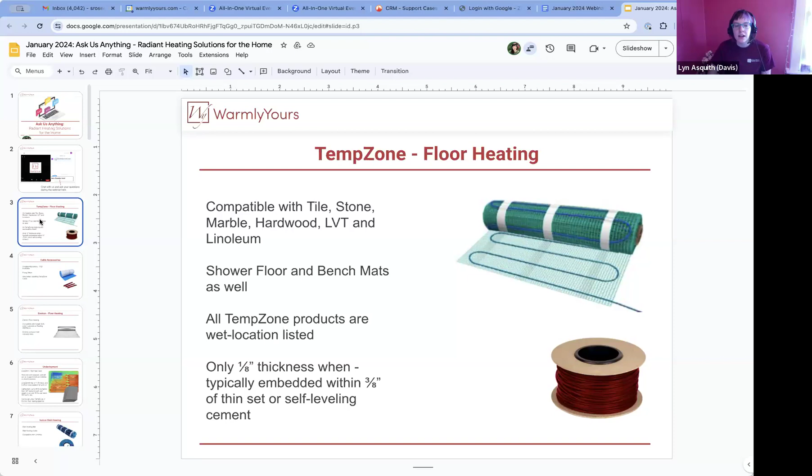Definitely. And can you actually go back to that last slide, Scott? Oh, sure. Looking at this picture, I think this is a good example of the two kind of main options you have with TempZone. You have our cut and turn mats or our loose cable. And then on the next slide, you'll kind of see the different options for the cable installation. So can you kind of walk us through what your choices are when doing a cable installation?

Yeah, cable installations do not require an underlayment or a membrane. Some systems out there, the only way that you can install it is using a membrane, but not every floor requires a membrane to be used. So sometimes there's no use to having that added expense, and that's why you can use the cable fixing strips and save yourself a lot of money. We're going to see a little bit later when we look at pricing that if you don't need to use a membrane, you can save a lot of money by not doing so.

So you have two different ways of putting the cable down: with the membrane, the Prodeso membrane, or you can use the fixing strips. And the fixing strips, you just put along the perimeter of the room, and you string the cable back and forth in those strips. And then you use that to hold the cables in place, because you always want to make sure that the cables are held in place at the correct spacing. You never want to overlap them. You don't want them touching each other, because that will be a problem in the future. So both of these products are designed to keep those cables spaced the way we want them to be.

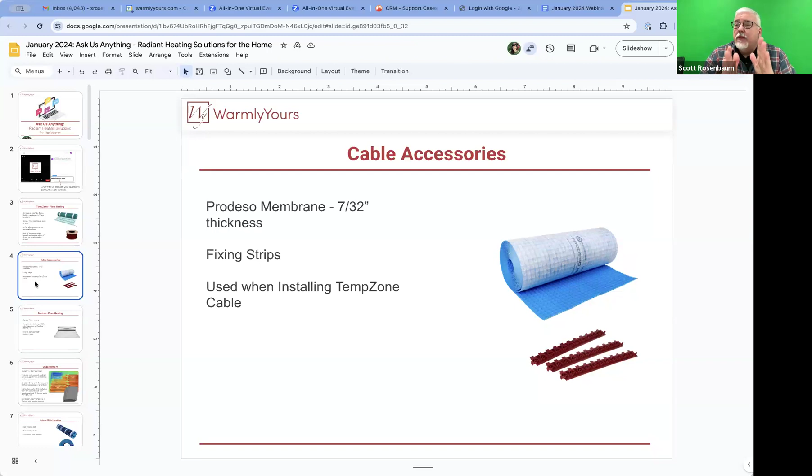Awesome. And then looking at one of our other floor heating options, we have Environ. So Environ is going to go under different types of floor than Tempzone. Can you kind of tell us where you would be utilizing the Environ product? Yeah, the Environ product is not wet location listed, so it's not designed to go in showers. You could put it in a bathroom if you wanted to, but definitely not in a shower.

I know some people that have used this with laminate in bathrooms. The thing is, it is not waterproof. It's water resistant, but it's not waterproof like the Tempzone product is. So it's to be used under carpet in the United States. Use it under laminate or floating engineered wood. You would not use this for LVT or any vinyl product.

This product is not attached to anything. It's not glued down, and nothing is ever glued or attached to it. It's simply put in a layer like a sandwich, and it floats around. And that's the key thing. This does not use thin set. This is not glued down onto anything.

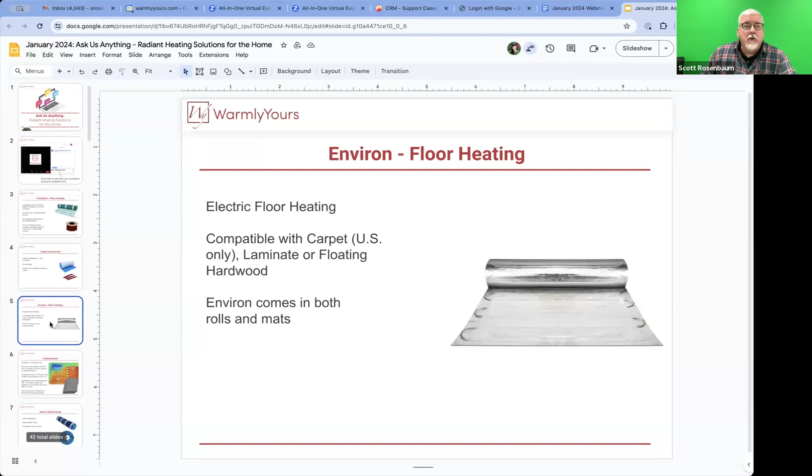Definitely. It comes in rolls and mats too. So if you want to do a great big area, you can do it like a big blanket and lay it out. It's about the fastest installation you can do when you're looking to heat a floor. Yeah, it's very, very quick. So moving on to underlayments, we do get this question a lot of, do I need to insulate underneath or above the floor heating? And the answer is generally on a concrete slab, you want to be insulating with our Cerazorb, which is a synthetic cork underneath the heat.

Can you kind of tell us what we're looking at here in this picture and why it shows how important Cerazorb is? Yeah, what we're doing is we're isolating the heating wire from the concrete. The concrete wants to pull the heat down into the concrete. Well, when it's pulling that heat down into the concrete, the spot you really want to heat, which is where your feet are, that's the spot that's not getting the heat.

So what you want to do is you want to put some R value between the concrete slab and the heating wire. And that's going to make the heat go upward as opposed to downward. And that's why you're putting this in anyway, right? You want to make sure that you have nice warm floors. If you take a look at this picture, this was a tile job that was done. And in this particular area, we left out a spot where the Cerazorb was left out.

So you can see that non-insulated area in the upper left-hand corner. That's where there is no Cerazorb. And see how it's blue there? That means that the heat that the wire is making is going down into the slab. All the other areas where it says insulated area, that's where the heat is coming up. So this was taken with a thermal camera, and you can see the actual difference here. And this isn't after it's been on for any long amount of time. This was just after a few minutes, and it's already 4 degrees warmer than if you don't use it.

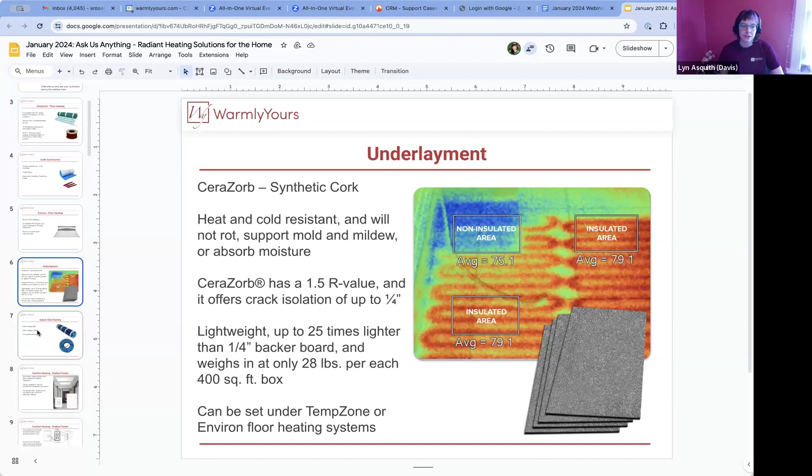And then our last but not least floor heating system is our indoor slab heating. Again, this is available in cut and turn mats or in loose cable. This is a great product if you're going to be doing concrete floor as the finished floor. So if you're looking at doing a stamped or polished concrete, or you're doing a new pour or new slab, this would be a really great option.

Yeah, if you're pouring a new slab, it's exactly what you can use. When you're heating a slab, it takes longer to heat up because you're heating 4 or 6 inches of concrete. Most of our other systems are heating 1 to 1.5 inches on the top surface, so the thinner the application, the faster it will heat, and usually the warmer it will get.

But we've done many jobs where this has been put into a new concrete slab. The most important thing is if you have a 4-inch concrete slab, the cable needs to be in the middle of it—you don't want it laying on the ground. It has to be in the middle because that heat needs to get to the top surface. So the most important thing when installing this product is to get it up in the upper half, at least an inch and a half deep. That's the sweet spot. Don't lay the cable down and then pour 4 or 6 inches of concrete over the top.

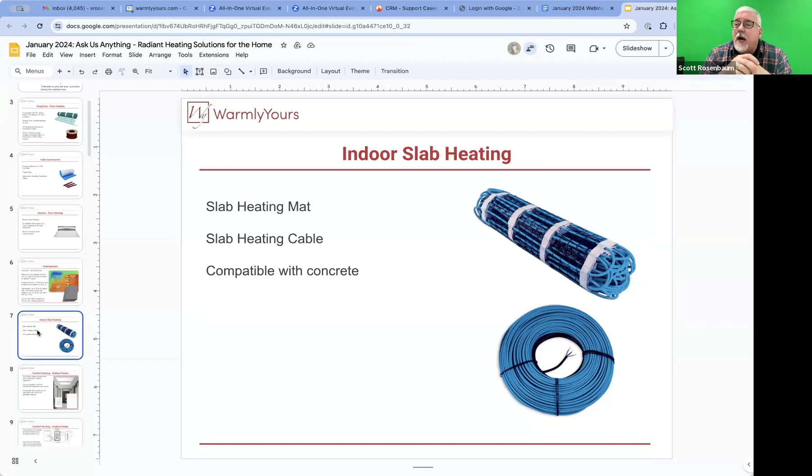Moving on to some of what we call comfort heating products, radiant panels are just an awesome product. They're really great if you're not looking at changing the flooring. I know for me, our house has the original hardwood—I'm not pulling that up to put floor heating underneath—but it definitely can still get cold, and radiant panels are a really great option to give you that warm, comfortable, radiating heat without having to do a lot of work.

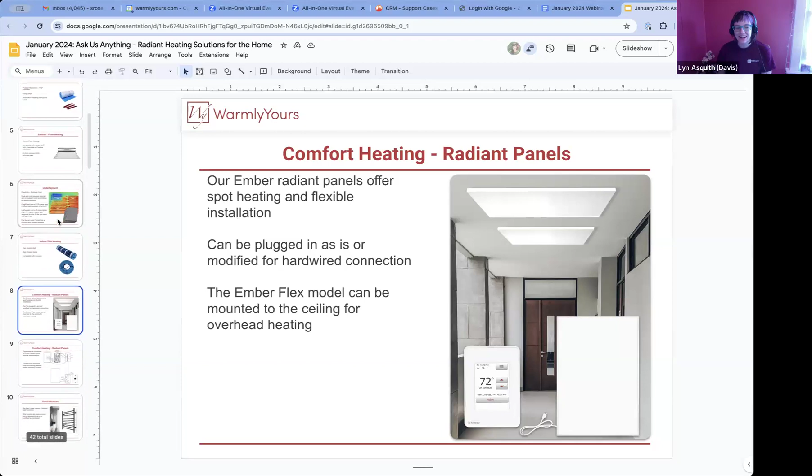Yes, it definitely can be. So looking at the actual installation or the wiring for these radiant panels, you kind of touched on this, Scott. You can use a thermostat to connect these. They can be, most can be either plugged in or hardwired. Is there anything people should be keeping in mind when it comes to the wiring and the setup for radiant panels?

No, it's very simple. It's a line voltage unit. It takes 120 volts. So you'll need a line voltage thermostat, and that thermostat is different than the one you have powering your furnace. So we do sell these thermostats, and it would heat in the exact same way as electric floor heating, but instead of having the heat coming from the floor, it's going to be coming from the wall or coming from the ceiling. But it's the same sort of idea, controlled in the same way.

So you can convert them. You can cut the plug off and do a hardwired job, or you can just use this box here, this outlet, put an outlet here, a duplex receptacle, and just plug it in there and have this duplex receptacle powered by a thermostat. So there's a lot of different ways you can do it. You can either put it on a switch or you can put it on a thermostat. Both of them you can power remotely, but there is no on and off switch on them.

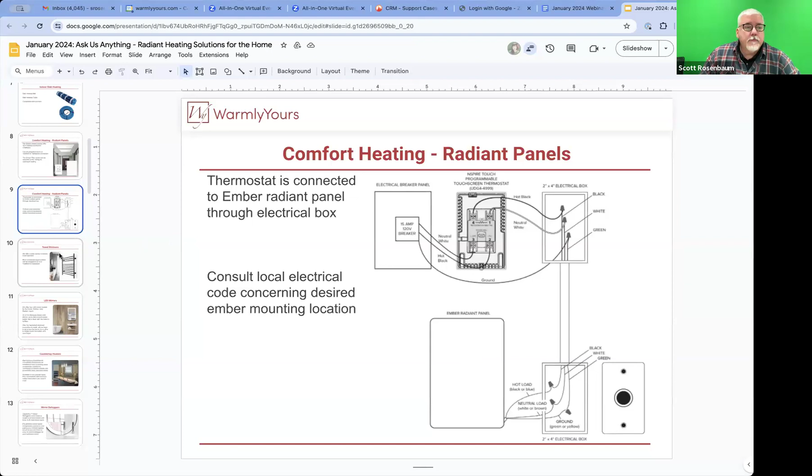Yes, good to know. Looking at our towel warmers next, we do have a very wide variety of all electrical heated towel warmers. And at this point, most of our models are dual connect. Can you kind of tell us what the dual connect models are or what makes them special?

The dual connect units don't use a wall plate. There is no wall plate here that is often associated with things on the wall where they get power. Now, if you do want a wall plate, then we do have towel warmers that do hook up that way, that are hardwired. But these units can either be hardwired or they can be plug-in. They're convertible. You make the decision where you put them in, if you're going to plug them in or if you're going to hardwire them.

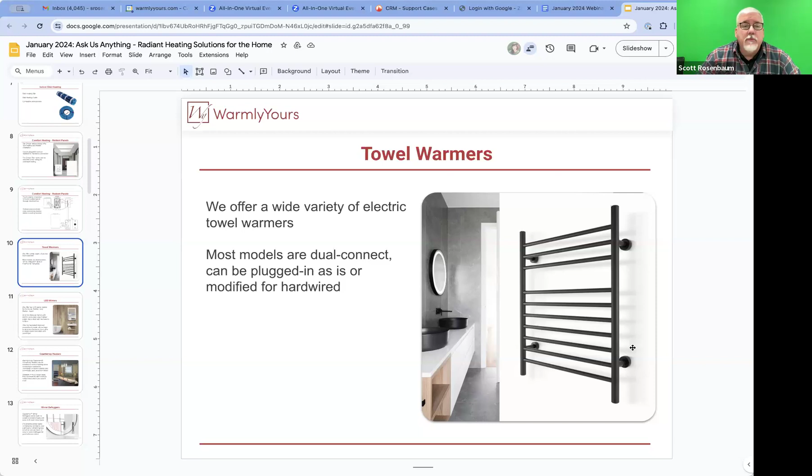So these are great for people that live in apartments who can't put new outlets in their walls. The dual connect means that you can either do a line cord sticking out and plugging it in, or it can be hardwired through this leg. If you don't want to do that, we do have towel warmers that do have a wall plate that you can put over an existing outlet box or something like that that you can use too. Yes, we have lots of options available for that.

And then another one of our really great bathroom products is our LED mirrors. So we offer four models of these, and they are all what we call our Marquee Series. They do come with a touch power button, it's very flush against the mirror surface. It's pretty integrated, but it is an important feature in these LED mirrors. Can you kind of tell us how these are controlled with that power button?

Yeah, you can hook them up to a light circuit that's existent, or you can leave it so it's not. So if you hook it directly to power, you just touch that button on the front. It's just actually feels your touch, and you turn it on or off that way. So that's what a lot of people do.

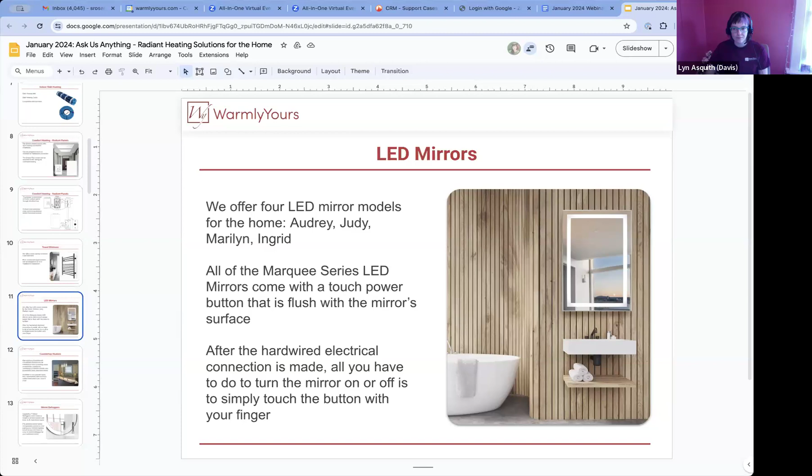Awesome. Sorry, had to clear my throat there. No, all good. I think we're all either getting sick or getting over getting sick.

So looking at our countertop heaters, these are a really great luxury product again for an area that is just extra chilly. I think a lot of stone countertops or overhangs, things like that are going to get really, really cold. And this is a simple way to add some extra comfort in those areas.

So we have four sizes available. They are basically, you just stick them right on the countertop and they're good to go. Can you kind of tell us how these are wired or plugged in, like how they actually work?

Yeah, they're actually a peel and stick application. So it's like a giant decal or something like that. And then it sticks to the underside. And then all you have to do is plug it in like a laptop. It's got a power box and a line cord. That line cord would just plug into an outlet.

Usually, if it's in an island like this, people will run a hole through the back where the countertop heater is, then put the outlet inside so they can plug it in and you don't even see it. All you see, if you get down under there and look up, is where the wire runs into the cabinet, and that's it. So it's very easy to connect. You plug it into an existing outlet, and most people just leave them on all the time because they heat slowly. That's why it's so good for marble and that sort of stuff. You don't turn it on and have it get really hot fast—it heats up slowly, so most people tell us to just leave it on. It doesn't use a lot of power, and it's a low voltage application, which is where that transformer comes in.

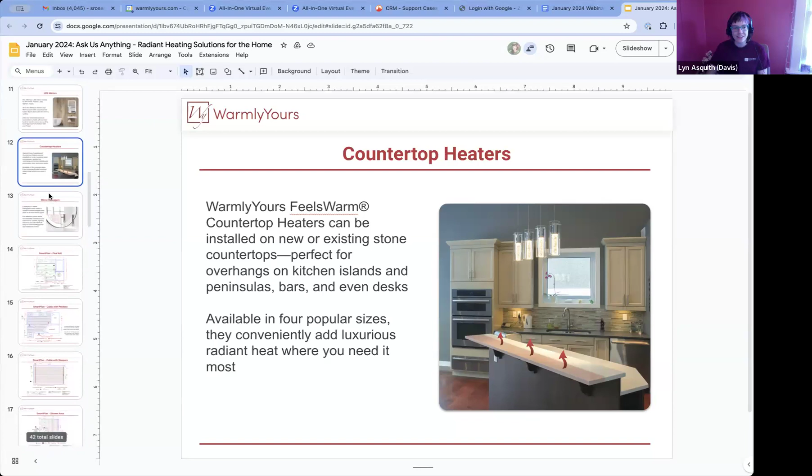And then our mirror defoggers—these are personally one of my favorite products, I just think they're very cool. It's a really easy, economical way to make your bathroom feel a little more like a home spa. These come ready to install, and we have several different shapes—round, rectangles—and different sizes to fit most mirror types.

Scott, can you tell us what you want to be doing when using these mirror defoggers, what kind of mirror you're looking for, or how you want to install it?

Yeah, it's peel and stick again—we're big into the peel and stick thing here because it's so easy to attach. You'd attach this peel and stick heater assembly onto the back of the mirror, and for best results it should go on the glass, since a mirror is glass with silver on one side and clear on the other. You'd want to mount it to the silver side to heat it up from the back. This is a 120-volt system, so you can put it on your light switch. When you turn the lights on for your room, this unit uses very little wattage, so it'll be on whenever your lights are on, and that way it'll always be clear.

The thing about that, though, is it's a 120-volt system, so it does not go in a shower—it cannot go in a shower. It needs to be somewhere above your sink or somewhere like that. But they're very easy; there's a wire that sticks out of the back, and you wire that to your light switch, and you're ready to go. Nice and simple—love it.

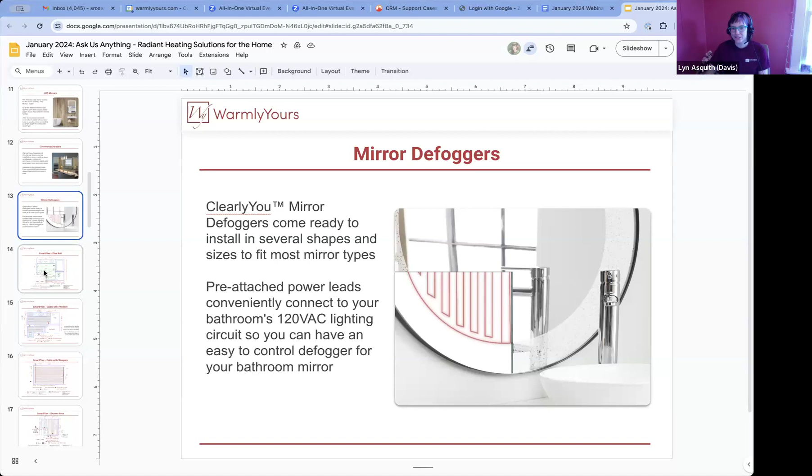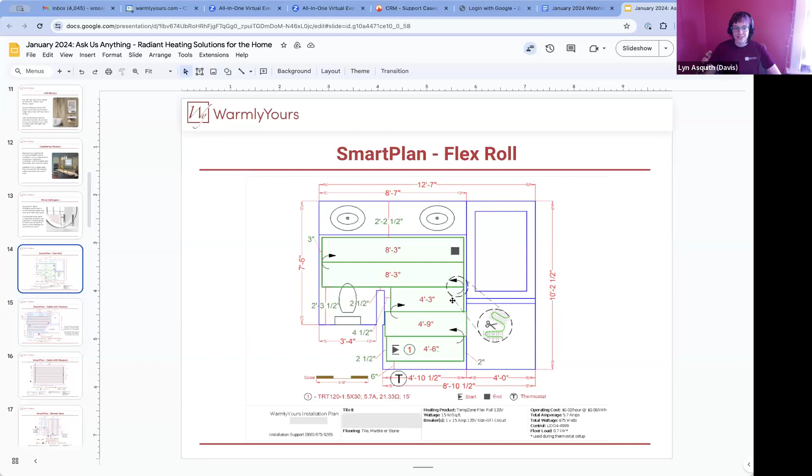And again, another smart plan showing the cable installation. This is specifically a cable with that Prodeso underlayment, and obviously it looks quite a bit different. Can you kind of tell us what we're looking at here, how to make heads and tails of this?

Yeah, it tells us right here what our product is. It's roll number one. Roll number one is 180-foot cable. It tells us what the amp draw is, what the ohms are supposed to be, and the cold lead, and it shows us where it starts here with the triangle. It shows us where it ends here with the square. And it shows you how to route that cable back and forth in the Prodeso membrane to get it towards the end.

If you look here, there is a red dot. The location of the red dot indicates the halfway mark of your cable. So this is 180 feet — this would be the 90-foot mark.

And you can see that if you've used all your cable, or if you're already getting the marking — the white spot on your cable showing up here — it means that you have the cables too close together. If you have the white spot on your tape over here instead of over here, it means you put it too far apart. So the most important thing when you're looking at this is to look at these green numbers. These green numbers tell you how far away the wire is from the wall.

If you don't follow these specs, and you see where it says 5¼ here, if you make this 1 inch instead, you're going to use up more cable because you're changing the space. When you start doing this, you use more cable per run as opposed to running cable straight from here to here. So if you change those distances, you change your coverage.

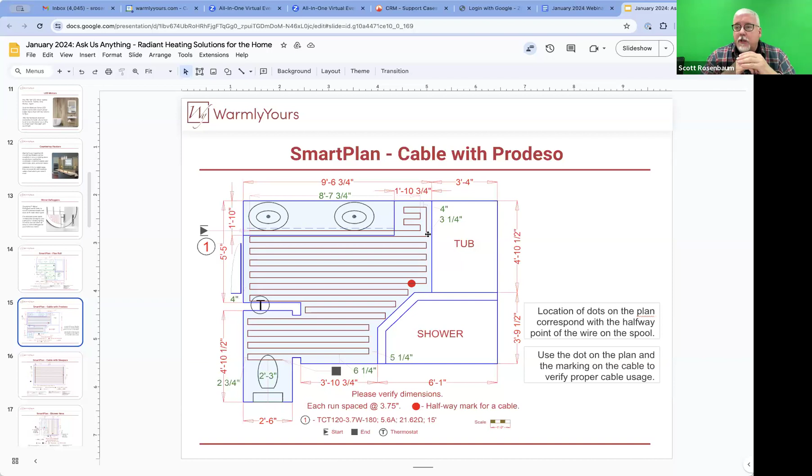However, this is with our fixing strips, and this one is utilizing sleepers, which is often going to be the case if you're doing some kind of nailed hardwood. So can you tell us how that works or how those are compatible?

With nailed hardwood, you're going to ask the manufacturer of your hardwood how often it needs nails. What's the nail rate? Is it every 6 inches? Every 8 inches? Every foot? Every 16 inches? Whatever that is, it's going to determine the width of these sleepers. These sleepers are these blue dots here.

So what you do is once you tell us the distance between these, you can make the wires go back and forth in between them. We also need to know which way it's going. In this drawing, the wood is going like this. If it were going the other way, the sleepers would have to turn, because they always have to be perpendicular so they can nail in. That's what you need to look out for.

Here the spacers are 12 inches apart, so that tells us every 3 inches we can do 4 runs of cable in between those. These sleepers are usually about 1.5 to 2 inches thick, and 3/8 of an inch high.

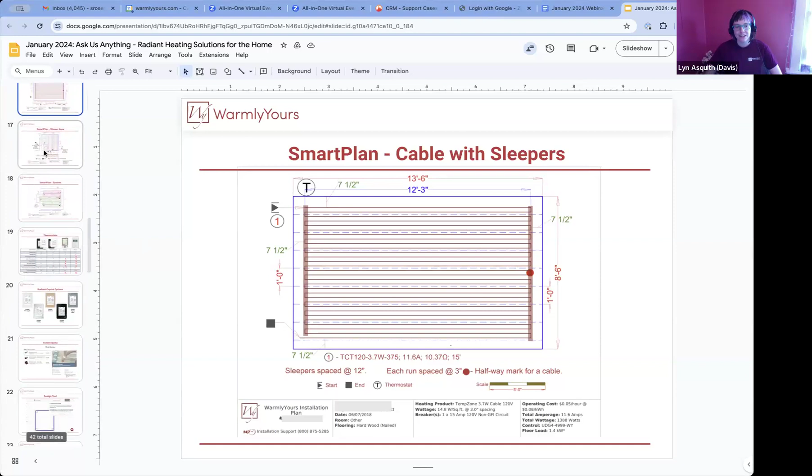Absolutely. And last but not least—actually we have 2 more, so disregard that. Second to last but not least is our smart plan showing the shower heating. This is really important because, if you notice, the shower is on a separate cable. So can you tell us why that would be?

Well, showers are normally thicker than bathroom floors because you have to slope them down to the drain. Depending on who's doing your job, it could be 2 or 3 inches thick at some points, where the regular part of the bathroom is only an inch. That inch is going to heat much quicker than the 3 inches of mass, because you have more thermal mass to heat.

Also, another benefit is if somebody comes in later and says they're going to change the drain, or there's a drain problem and they need to break it out and put a new one in, and they hit the wire and damage it, you can just say, we're going to leave it alone. The rest of the bathroom still works because it's on its own cable. We'll just leave this one alone since they've ruined it by ripping up the whole thing. That's one benefit.

If you ever have trouble with your plumbing, it would behoove you to have 2 cables. That way, if something happens in that shower and they need to redo it, it doesn't damage the heat in the rest of the room.

You can also put that separate cable on a separate thermostat too, so you heat it up in advance and you heat it up hotter than the rest of the room. So it gives you more flexibility depending on what you want your system to do. But that's the difference. Definitely.

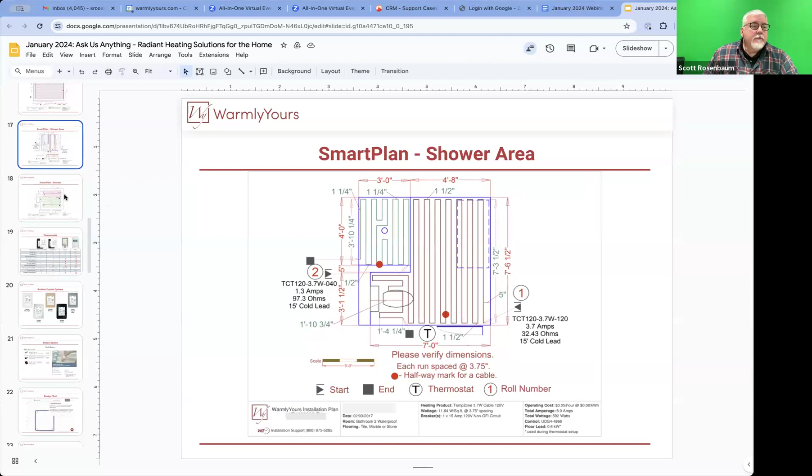And then looking at Environ, this is a very similar smart plan to the flex rolls or the TempZone flex rolls. And that's because, again, it's the same concept of cutting and turning. So you're, again, going to see exactly how far from the wall you need to be, exactly how far you'll be letting each run go before cutting and turning it. The one main difference here is you can see that around the edges of the room, there's a lot more space. So can you kind of tell us why that perimeter is the way that it is?

Yeah, this is done in carpeting in the United States. You can't heat carpeting in Canada unless your local code says you can. The distance of 1 foot around the perimeter is for the carpet stretcher to have something to be able to grab into the carpet without hitting the heating cable. If you did this wall to wall, as soon as that person came in with the carpet stretcher, there's a pretty good chance that they'd hit the wires when they're trying to stretch it.

So that's why there's always a perimeter around the room to allow the stretcher to get at different angles and have something to grab into and put it over the tack strip. If you didn't do that, you'd be in trouble. Yes, definitely. And we do run into that somewhat often.

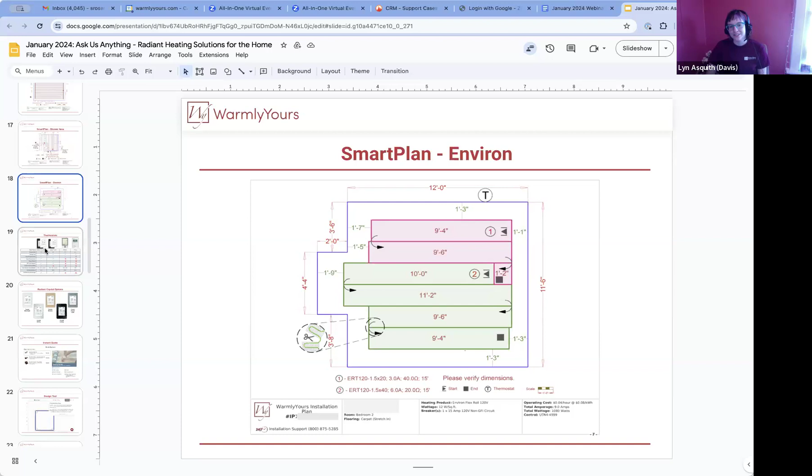So looking at our thermostat options, you can see that we have 4 options available currently. The Inspire Touch is definitely our most popular. It is a super user-friendly interface. It gives you the option to program all 7 days of the week so that you don't have to ever worry about or think about your floor heating. It'll just turn on and off for you as needed.

We also have a Wi-Fi option for this as well, and the main difference is that that will give you a weather indicator on the actual thermostat face, as well as the ability to control the flooring system from an app on your phone.

Then we also have the non-programmable Entrust, and that's a really great model if you have a space that you're heating seasonally. Maybe you turn it on every winter and you just don't turn it off until it gets warm again. Or if you have a flooring type that shouldn't have a lot of variation in the temperature. So especially we see this with certain types of wood, they don't want you to have much or any fluctuation in the temperature. So you would want to just let this turn on, set it, and forget it. We do also offer the enhanced programmable thermostat. So can you kind of tell us, Scott, in which situations we'd recommend that be used?

The Enhance is for people that have the old thermostats that have the knob on the front. We call them temperature regulators. It's 0 to 10, like a volume control. So if you have one of those old controls, that works as a regulator. You turn it up to a certain amount and it keeps it at that temperature forever. If you want to cool it down, you turn it down, it keeps it at that temperature forever, but you adjust it with a knob.

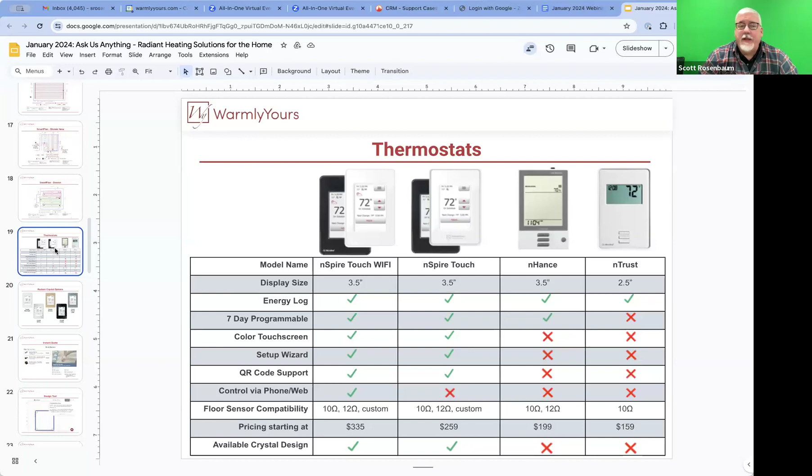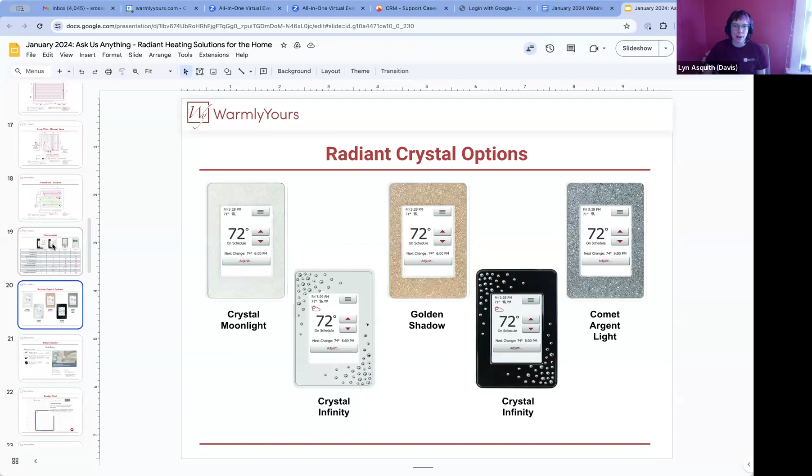And just to briefly touch on our radiant crystal options for our thermostats, we have some of these really, really unique models available. If you'd like to match your home decor, if you want to make sure that this is really individualized to your personal taste, we can definitely chat about our really beautiful radiant crystal options available.

So, moving on to some of the tools that we have available to help you plan out your system to make your heating journey as simple as possible. We offer an instant quote building tool on our website, and this is available 24/7. You can check it out at our website. There's lots of different places on the site where you can access the instant quote builder. It's going to ask you a few questions about your project, answer them as specifically as you can. And then from there, it's going to show you the options that you have.

And as you can see in the picture here, we'll show you a video of how each of those systems is installed and how they work, as well as all of the actual electrical specs. And Scott, can you kind of touch on the pricing differences in the systems that we have up here? Yeah, the TempZone Flex Roll, it just rolls out and you cut it and turn it. It's a faster application, less labor, and that's why it's the most expensive.

But then what I like to point out to people are the bottom two choices: TempZone cable with the membrane and TempZone cable without the membrane. Remember, we talked about not every single floor needs a membrane. So the thing is, if you have a choice between this product at 868, and you have a floor that's very solid, doesn't have a lot of deflection, doesn't need an anti-fracture membrane, you can save yourself about $300 by leaving out the membrane. So remember, not every single floor needs a membrane. And if it doesn't, then why not get the cable and fixing strips and save yourself a bundle of money? Absolutely.

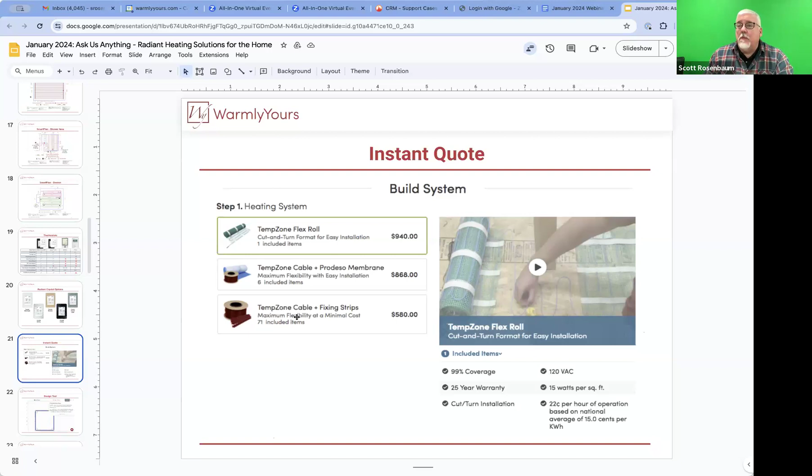So our next tool on our website is our design tool, and this is really great if you would like to utilize it to draw up your plan to send in for a smart plan. So this way, if you don't have an architect's layout or something like that, you're able to actually draw your room and customize it on our site. You can add fixtures, things like cabinets, bookshelves, any kind of furniture that you want to be heating around instead of underneath. All of that can be drawn up and added here and then sent to us for a smart plan.

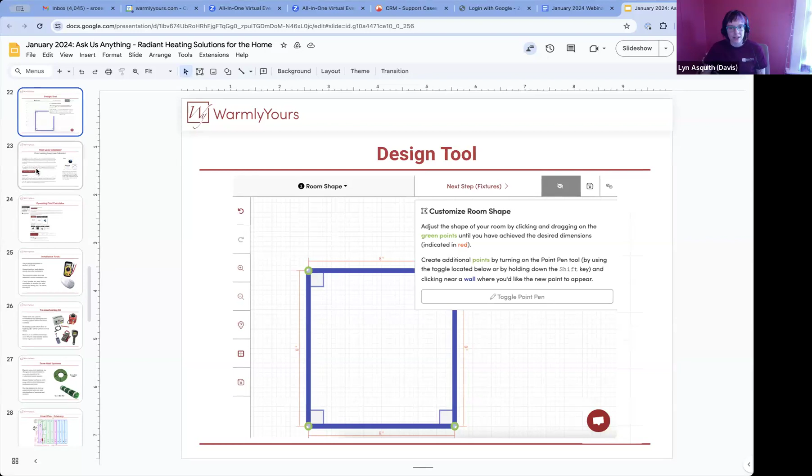And then our heat loss calculator is one of my favorite tools. It's a really great way to ensure that the heat that you're putting in is going to give you the results that you're looking for. And Scott, can you kind of tell us a little bit about the science and the math behind the heat loss calculator? If you're thinking of doing a floor heating project as the sole source of heat in a room, you need to know how many BTUs that room needs to be warm. Then you take the BTU supplied by our product and say, the BTU supplied is more than you need, it's going to be plenty.

If you have a room that has a bunch of exterior walls, a bunch of exterior windows, skylights, a fireplace, an exterior door, those are all gigantic heat loss items. That means they let heat disappear, which means they let the BTUs leave the room. Well, you've got so many BTUs that you're making, and if you put them in a room that's like a sieve, all those BTUs are just going to go out. You want a room that has very little heat loss. So a huge bathroom with 11-foot ceilings, 3 exterior walls, giant windows on each wall with skylights, that room is probably going to have too much heat loss to heat.

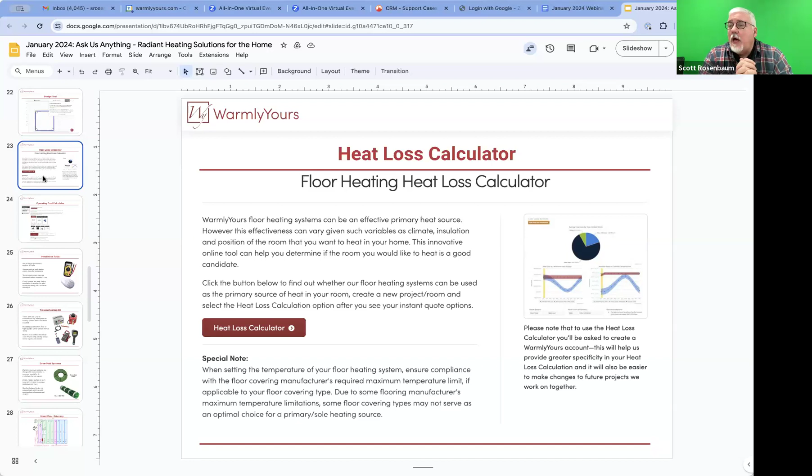Absolutely. And that heat loss calculator usually includes a general operating cost as well, correct, Scott? And it'll tell you, it'll work 90% of the time, it'll work 100% of the time, all that information. And yeah, because it'll tell you what the product is in the floor, what it will supply and what it will cost. And then it's part of that plan.

Definitely. So then the operating cost calculator is a really great option if you aren't ready to do a full heat loss calculation yet, and you just want a kind of idea of what the system will be costing you to run day in and day out. It's kind of a common misconception that these are really expensive to run or really inefficient, and that really isn't true, and you can really see it.

Playing out here, we have an operating cost calculator for our floor heating and for our snow melting systems, where you can pick the system, the size of it, the energy rates in your area, and then at the bottom in that daily usage bar, you can actually play with that slider to see what the system will cost to run per day, per month, per year, depending on the number of hours that you're running it.

And the thing is with radiant heat, a lot of people that have never used radiant floor heat think like forced air. Okay, I have a thermostat that pumps out forced air throughout the entire house to keep the entire house warm. With radiant heat, we say put a thermostat in each room that you want radiant heat. And if there's nobody going to be in that room that day, don't turn it on.

And then what you can do is you can set your thermostat for your main HVAC furnace down to 65, or 64 or whatever, and if you're in the living room from 5 till 9 p.m., then you heat the living room. And then when you're done there, you turn the heat off and you go into the bedroom.

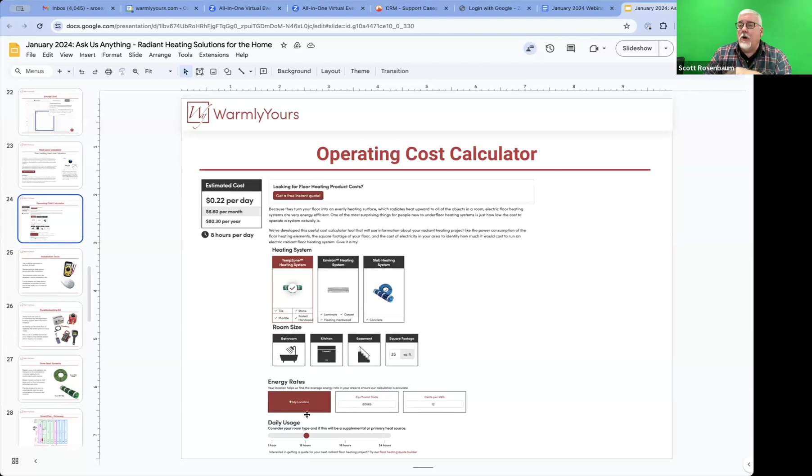So one thing to think about: if there's no one there, you don't have to have it on. It's not like a furnace, so you can really save yourself money. If we're here from 5 until 8 instead of 5 until 9, I'll change the schedule on my thermostat and shave an hour off. You can play with the slider at the bottom, changing hours from 4 to 3, or 8 to 7, and see how that affects your operating costs. It's really a fantastic tool.

This is definitely your area of expertise, Scott. Can you tell us what tools you want to have while working on your floor heating installation?

You don't need a lot of specialized tools—scissors, general things you'll have laying around the house. But you are going to need a digital ohm meter, and you want to buy one that's inexpensive with a dial you can set to 200 and to 20K. You don't want a $500 self-ranging meter because they're very difficult to use. Buy an inexpensive one that lets you choose your ohms ratings.

You're also going to want a circuit check. You test your product when you get it with your digital ohm meter to make sure it matches the value it should. Then the day of installation, you measure it again to make sure everything's good, because you don't want to install a product that got damaged on the way to your house. It doesn't make sense to test it, find it doesn't work, and then put it in your floor anyway. Who would do that? You want to make sure it's good.

The way you test it: you test it the day of installation. You put the circuit check on, then lay out the cable, doing your cuts and turns. After laying it out, you disconnect the circuit check, test it with the digital ohm meter again, and make sure your readings match what they were a few minutes ago. Then you put the circuit check back on, and now you can start putting thin set over the top. If that alarm doesn't go off, you're usually in pretty good shape—no need to worry. Then at the end, you do your ohms test again, and it should match what you did in the morning. That way you know every step of the way you had a good result.

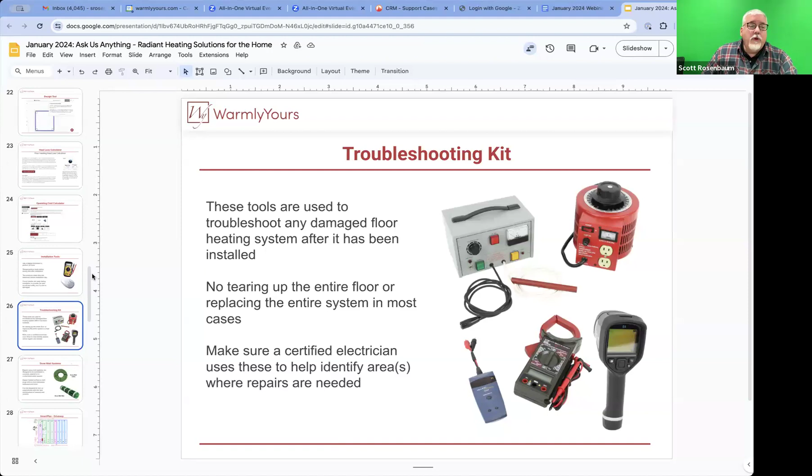That's a good thing, but they're very expensive, so most electricians don't have this stuff laying around. We rent them out to people who need them. We work with local electricians because most electricians won't have $5,000 of equipment to fix a problem they may never see. But you can fix a floor. A floor that isn't functioning correctly can be repaired. It does not need to be ripped up.

Absolutely, I think that's a really great point to hammer home. And then going on to our snow melting systems, these are very similar to our indoor floor heating.

I think, Scott, you like to say it's kind of like floor heating on steroids. This is going to be a little bit stronger. It's designed to actually warm up driveways, walkways, anything like that, and keep that snow from accumulating.

Yeah, what's really, really strong and really, really big and really, really green? Shrek. Well, I don't know if he's as strong, that's pretty good, I didn't even think of him. I was thinking more like the Hulk. Isn't the Hulk green? Yes, he's severely on steroids, but this is like Hulk heating wire.

So it does the same thing. It has more watts per linear foot, which means it gets hotter than the stuff that goes in your house. Remember at the very beginning, we talked about TempZone, it's great for indoors. This is the stuff that's great for outdoors. The cable in your house is about 3.7 watts per linear foot. This is about 12 watts per linear foot. So you can see that makes a big difference.

So it needs to be embedded in a solid system, which means it cannot go in gravel. You cannot heat a gravel driveway with this. It must be in asphalt, or it must be in concrete, or it must be under pavers, according to the National Electrical Code. Other than that, it works fantastic, and it's designed to melt the snow out there on your sidewalks, on your patio, or wherever you want it to be, a driveway.

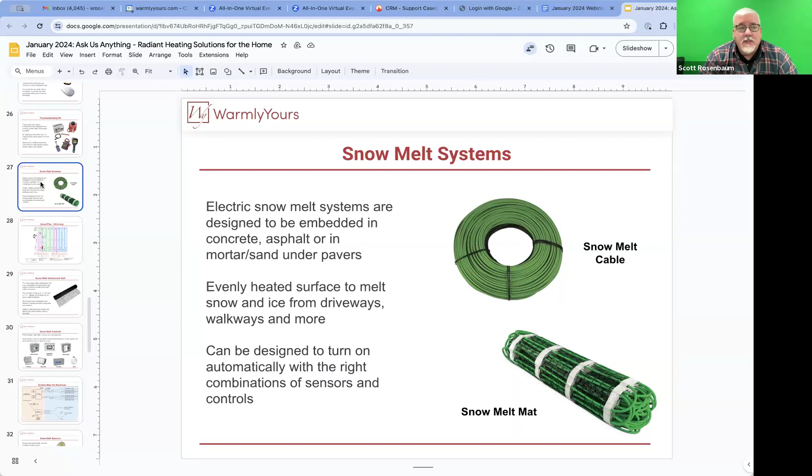We have a video of this exact driveway on our website, and that's how you do that installation. So if somebody comes up to you and says, I'm going to do that in one pour, you're going to say okay, thank you, and move on to the next one, because that's the way you need to do it.

Because it's asphalt, it has an over-temperature sensor, which is required in some states no matter what the surface is. But it's especially prevalent for asphalt, because in the summertime you don't want the system to come on if your asphalt is already at 80 degrees, since it can turn it to soup. We've never had anybody complain about that, because every job we've quoted has come with this controller, but I've never seen one turn to soup either. It's required by code in some states, and otherwise it's just a secondary way to make sure your system doesn't come on in the summertime.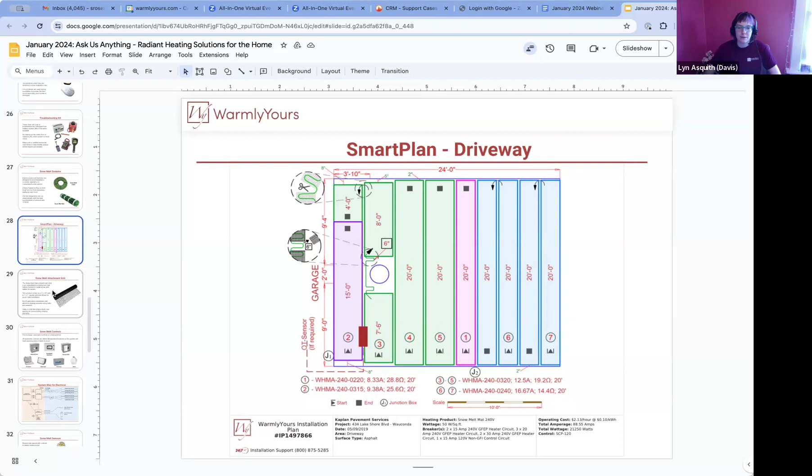We're going to get to that in just a moment, but just to briefly touch on it, we do have lots of options available in terms of how to turn that system on and off, whether it's automated or not. We'll go into all that in just a moment.

And then the snow melting cable attachment grid. This is a really great product to help make that installation easier. This is great to tack down underneath pavers, because you tack it down, attach the wire to it, and that holds it in place. Then you can start putting sand over it and then putting your pavers on top, because you never want the pavers to sit directly on the sand. You want to make sure these cables stay nice and flat.

That way you can tack it down at each corner, like if you have a 20-foot square patio, make it nice and tight, and then run your cable back and forth, then pour your sand and set your pavers. It's also very good for people using existing concrete stairways, especially in cities where they have exposed concrete but want to put snow melting underneath a limestone cap. You'll see a lot of these in Chicago. Everybody has one on their stoop - limestone caps, limestone stairs with a limestone capped area at the top and bottom.

What that allows you to do is screw this into each step and then run your cable back and forth on the step to hold it in place while you're putting mortar over the top and setting those products down into it. That's definitely a big Chicago thing over here. Primarily, it's there for spacing - to keep your cable spacing the same. You never want cables to overlap or butt up against each other, because wherever that spot is, they can overheat and fail. They're supposed to be at least 2.5 inches apart.

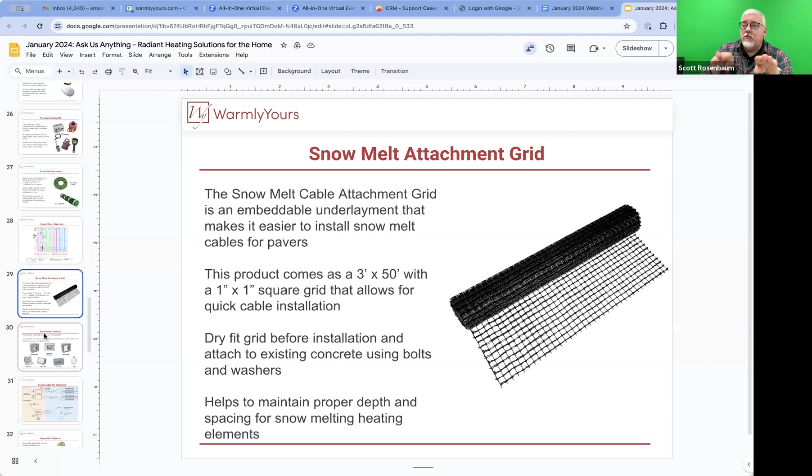And then talking about the controllers - you'll want to pick first how you want the system to run, or how you plan to be utilizing it day to day in the winter. So you're going to pick between an automatic control or a manual timer. Can you tell us, Scott, what the difference is, and why you would want to pick one or the other?

A manual timer - if you're home all the time, like if you work from home, you can use a manual timer. I'm going to go turn it on when it's starting to snow, and you can actually turn it on ahead of time so it's hot. So the pavers are hot or warm, and when the snow hits, it melts. So it's purely manual - I'm going to turn it on, I'm going to turn it off. The Wi-Fi is a manual control too; you turn it on with your phone and turn it off with your phone. If you forget to turn off the Wi-Fi switch, you will have a gigantic electric bill because it will stay on and on and on, especially through the last snow of the year going into summer.

The last thing you want to be doing is heating up your driveway all summer long. The Wi-Fi is great if you want to turn it on or off with your phone. But you have to remember to turn it off. What's great about the timer is you set it to 10 hours and it ticks down and turns off. There's no leaving it on by mistake.

All these other units require a sensor. When that sensor says it's 38 degrees or less and it's snowing or raining, it'll turn the system on. Then when it stops snowing or gets above 38 degrees, it goes into an after-run time. Your snow melting is really two events: the actual snowing event, and then the after-run event once it quits snowing.

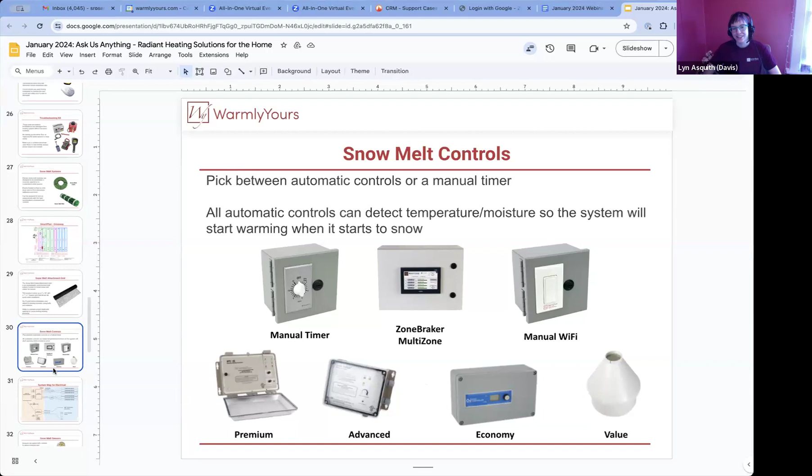This is a pretty in-depth drawing showing what needs to be mounted indoors versus outdoors. This part out here is 240-volt heating products. Over here is 120 volts. This is low voltage. So everything to the left goes inside, meaning your breaker panel is indoors, and your relay panel has to be indoors because it's an indoor rated box. It is not rated to sit outside. If it rains and this is outside, it will fill with rain—it's not designed to be outside. Your controller sits inside, and if you have a remote control override, it sits inside too.

Everything to the right is outdoors, because you can't put your high temperature limit sensor, which goes in the slab, indoors—it has to be outside to work. And your aerial mounted snow sensor, which sits waiting for snow to hit it, has to be able to get hit by snow. Unless you have a really bad roof, you're not going to get any snow if you put that inside. So everything over here needs to be outdoors along with the junction boxes, and everything to the left needs to be indoors.

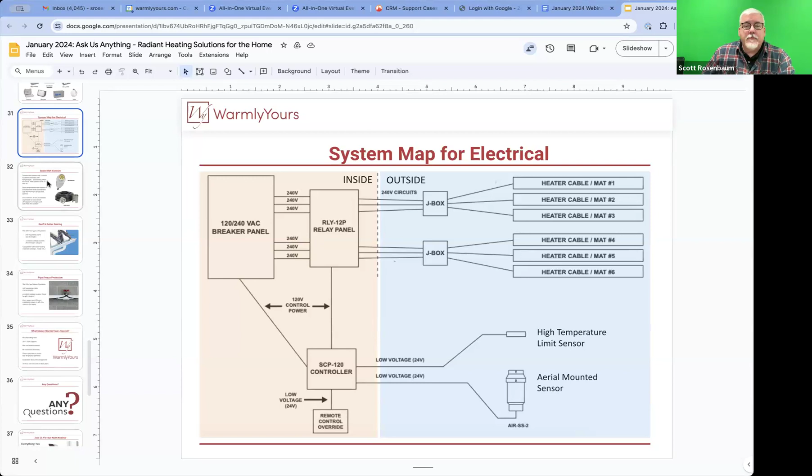Last but not least, looking at our snow melting sensors—this is what you'll pair with those controls to automate the system, to detect if there's moisture and what the temperature is, and to tell the system to turn on and off. We also have our over-temperature slab sensor, which you'll see at the bottom, great for a ZoneBraker control or the premium control. The aerial sensor can be purchased separately, and it helps detect changes in the atmosphere, whether it's snowing, not snowing, or slush, telling the system to turn itself on and off as needed.

The aerial sensor has to be somewhere where snow actually hits it. We had a call from a guy today who said his system wasn't turning on—it was snowing and it would not turn on. Why wouldn't it turn on? We asked him to send pictures so we could see where the sensor was. Maybe that had something to do with it. Well, his wall was here outdoors and his sensor was put right here—the snow always fell everywhere but where the sensor was.

So what I tell people if they're thinking about putting a snow system in is walk outside after it snows and see where the snow hit and see where it's bare. Wherever it's bare, you don't want that sensor to be, because no snow is ever going to hit there. And if you don't have any snow there, it's not going to turn the system on.

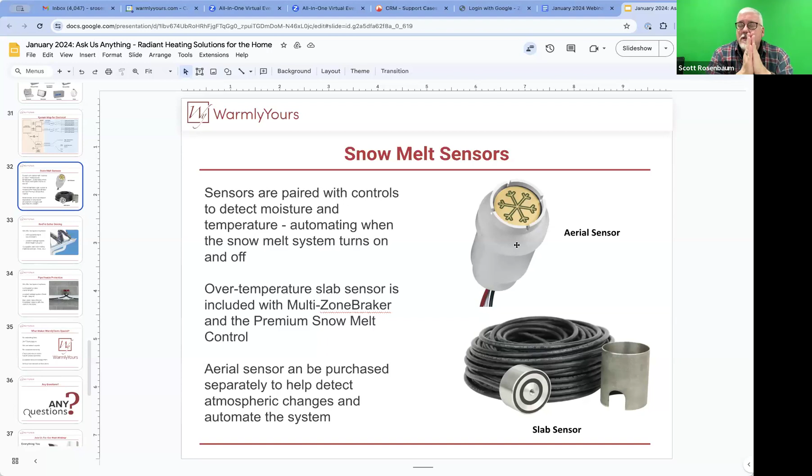Good information to have. And then we do offer some other cold weather options. We have a roof and gutter de-icing system. We actually have two options for this. We have self-regulating, where it can be cut to length, or we have our constant wattage system, which is a fixed length, plug-in, super easy kind of plug and play roof and gutter de-icing option. Roof and gutter de-icing is compatible with most roofing materials, and it's a really great way to help out if you get ice dams and things like that. It'll prevent any kind of damage to your roof.

Yeah, so just a quick example, if you have a steel roof, you have to use self-regulating cable. Constant wattage cable is not allowed to go on there. So there's a way, if you have a roof, we can heat it. It just depends, most of the time, on what type of roof it is, depending on which one of these you want.

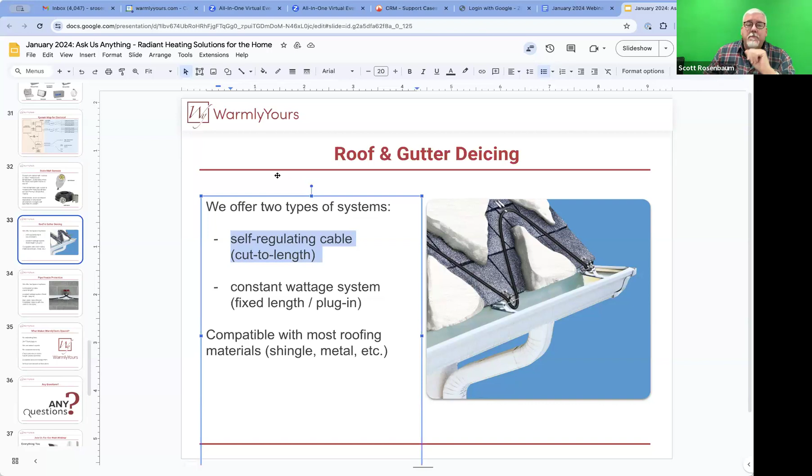Self-regulating cable, this cable here is the only kind of cable that you can cut to length that we sell. Everything else is constant wattage, but this self-regulating cable can be cut anywhere. It's a miracle product. So that's something that you want to look out for, but that's the big difference between those two.

And then we do also have pipe freeze protection, and it's the same kind of concept. We have self-regulating and constant wattage systems for this, and they are really great to keep pipes from freezing in the winter. So again, same kind of concept for this.